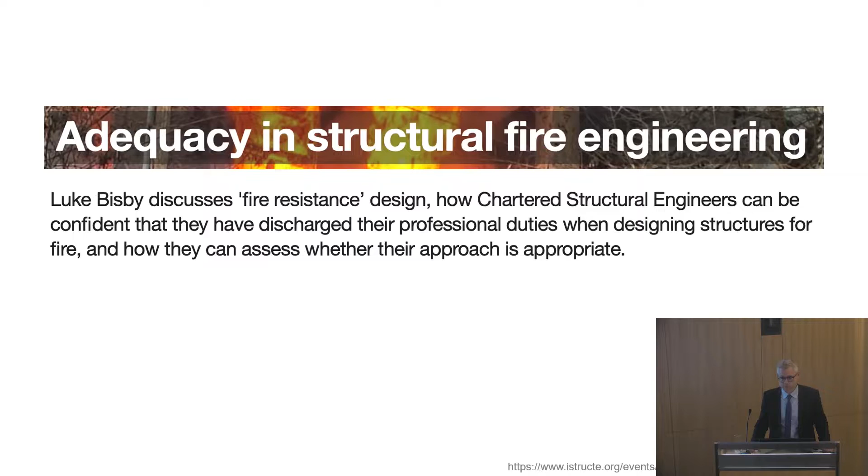I went back and looked at it earlier in the week and thought, is that what I said I would do? Fundamentally, this talk is about trying to answer the question of what is adequate with regards to structural fire engineering. My intent is to be a bit provocative and to open up some discussions that I think are very important for the structural engineering profession to have, particularly now in the United Kingdom.

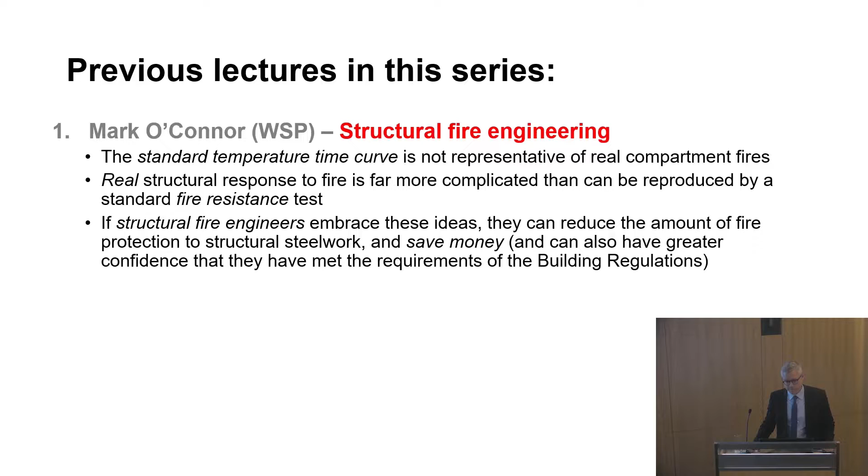There have been two previous lectures in this series specifically focused on structural fire engineering. The first was by Mark O'Connor, whose title was Structural Fire Engineering. To paraphrase the key messages from Mark's talk, apologies if I get this wrong, in his opinion the standard temperature time curve is not representative of real compartment fires. Real structural response to fire is far more complicated than can be reproduced by a standard fire resistance test. I'm going to come back to these ideas as I go through. He said if structural fire engineers embrace these ideas, they can reduce the amount of fire protection to structural steelwork and save money, but also give us greater confidence that we've met the requirements of the building regulations. Of course, I agree with all of those statements.

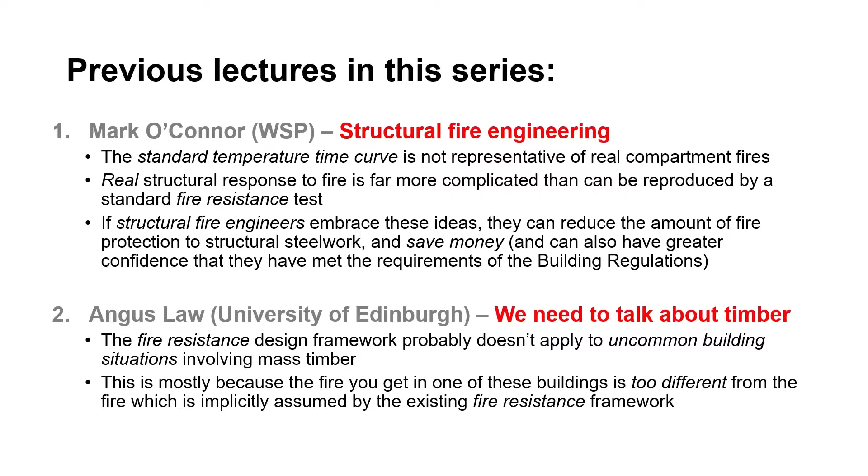Angus Law, my colleague at the University of Edinburgh, titled his talk We Need to Talk About Timber. Paraphrasing Angus, the fire resistance design framework probably doesn't apply to uncommon building situations involving mass timber. This is mostly because the fire you get in one of these buildings is too different from the fire implicitly assumed by the existing fire resistance framework. So there is an assumed and implicit fire that we use to design as structural designers. I put these up because I'm going to come back to all of these ideas as I go through.

Now, I'm going to say some things in this talk that are challenging to this institution and to its members. I'm going to ask chartered structural engineers to reflect on their ethical and legal obligations. I'm doing this because I, too, am a chartered structural engineer, because I wear an iron ring on the pinky finger of my working hand, and some of you will know what that means, and because of my own very challenging professional context during the past 2.5 years.

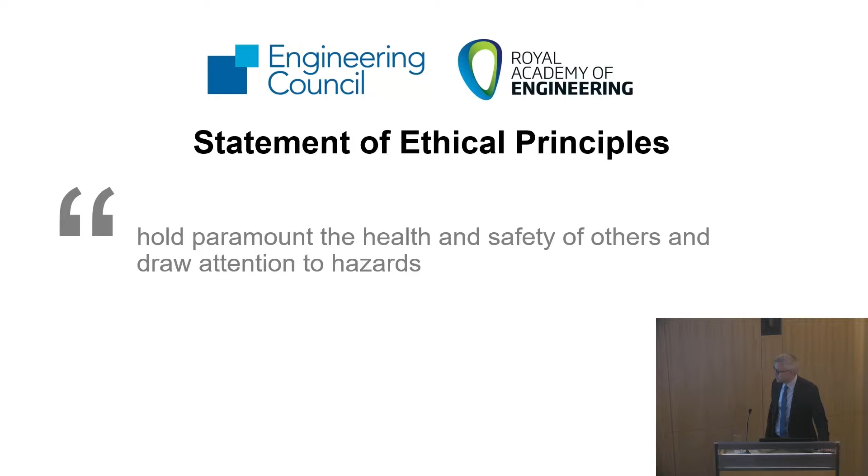As a chartered structural engineer, I am bound by the IStructE Code of Professional Conduct. It says that I should subscribe to the Statement of Ethical Principles of the Engineering Profession, issued by the Engineering Council and the Royal Academy of Engineering. Although one wonders if the word must should be there rather than should, with respect to the context. Nonetheless, the Statement of Ethical Principles requires me as a chartered structural engineer to hold paramount the health and safety of others and to draw attention to hazards. That's what I'm trying to do this evening, and to identify, evaluate, quantify, mitigate, and manage risks, and not knowingly mislead or allow others to be misled. So I'm going to try to lead you away from being misled, if that makes any sense.

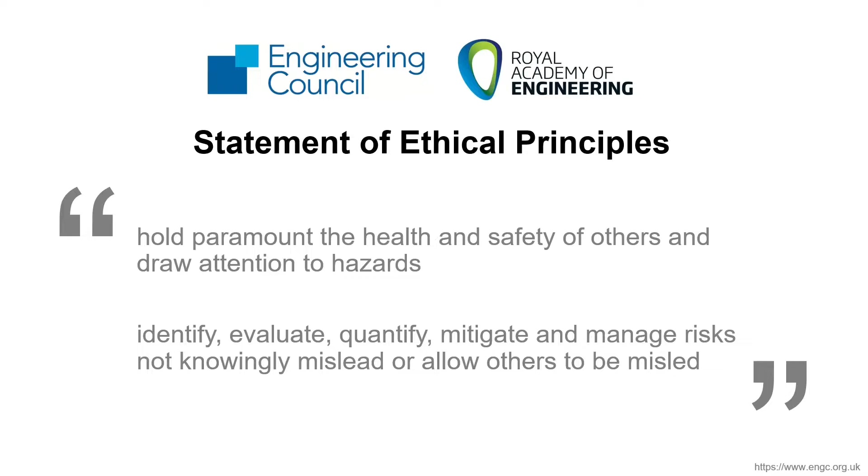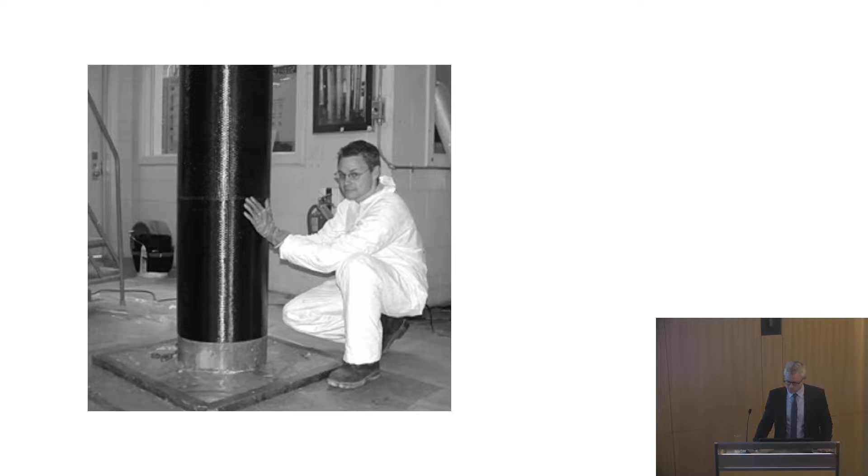My PhD was looking at the fire resistance of reinforced concrete columns that had been strengthened by confining them with carbon fiber reinforced polymers.

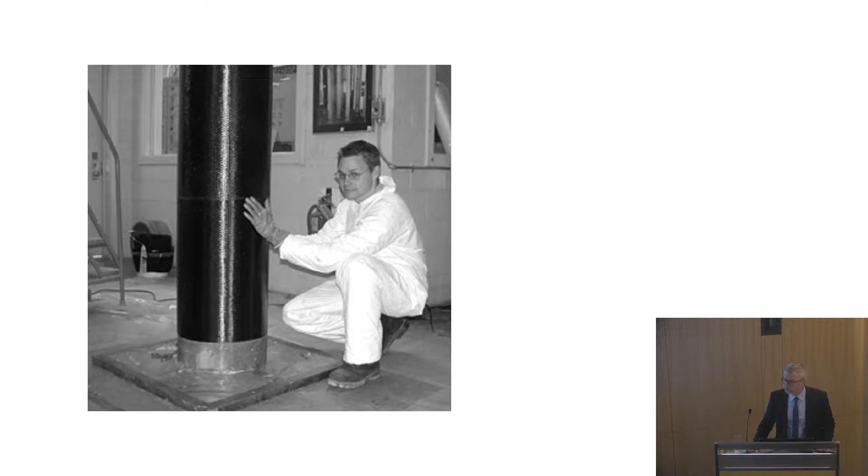So there I am. I've built a reinforced concrete column, and I'm wrapping it in carbon fiber. This carbon fiber is bonded with an epoxy, so it burns rather enthusiastically, it has to be said. I was charged with working with an industrial partner to better understand the fire resistance of these types of structural elements so that they could actually be implemented in buildings.

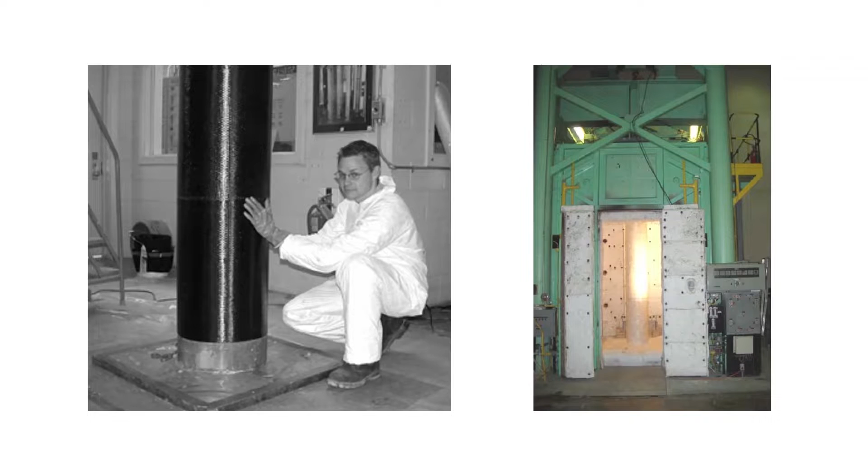So we built some columns, wrapped them in carbon fiber, applied some insulation, and stuck them inside a fire testing furnace at the National Research Council of Canada in Ottawa. We subjected them to a vertical load that we decided was approximately the load the column might be subjected to in a strengthened situation in service in a building.

We closed those doors on the front, and we subjected that column to the standard fire, a standard temperature time curve, using a bunch of very high-powered propane burners.

We didn't know what the inadvertent eccentricity at the top of the column was. We didn't know what the fixity of the column was at the top or at the bottom. We couldn't measure its lateral deformation during the fire. We just put some load on it and heated it until it broke, and we called that the fire resistance.

We did all that because our industry sponsor for the project was focused on one thing and one thing only. He wanted to get a fire resistance rating.

And yet the fire resistance justification we came up with didn't need to be supported by full-scale fire resistance tests. It didn't need to be supported by the detailed finite difference heat transfer models I developed as part of my PhD, or the detailed fiber section structural response models I also developed.

All that was needed was a little bit of fundamental understanding, a little bit of understanding of what fire resistance is, and a little bit of engineering judgment.

But nonetheless, our industry partner got his 3-hour fire resistance rating, he got his certificate, and he went off into the world and made shed loads of money, I can tell you. And of course, I got my PhD, because here I am.

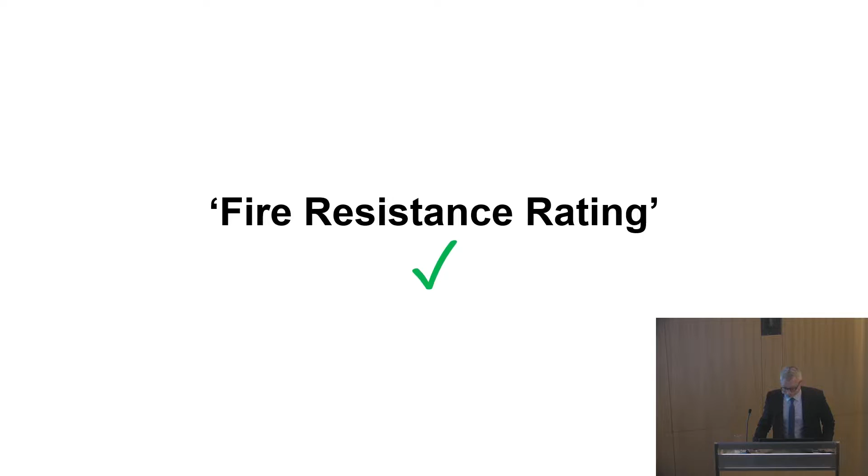But I knew that I hadn't earned it. And so I started my atonement, the making of amends for the sins of my PhD.

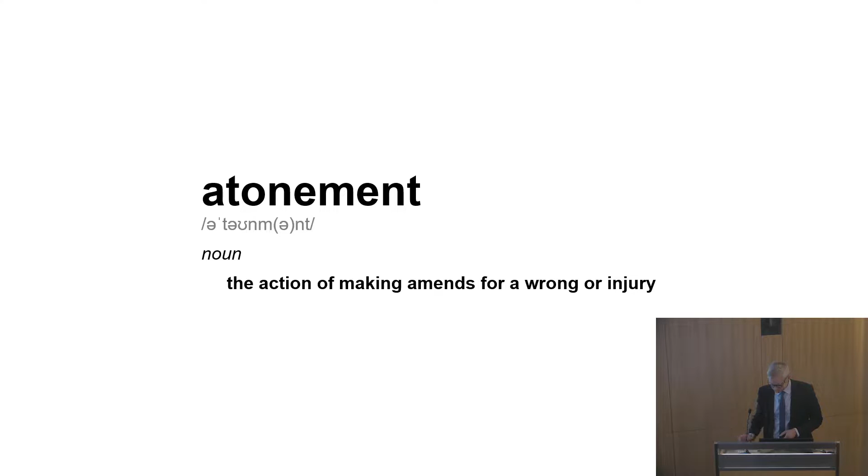I was inspired in my atonement by the post-Cardington performance-based structural fire engineering design movement that was happening here in the UK at the time. See Mark O'Connor's prior talk if you want to learn more about Cardington and what came out of it, and what then happened in the industry as a consequence.

I moved to the University of Edinburgh to become an evangelist structural fire engineer. I started spreading the gospel of performance-based structural fire engineering design.

This gospel was very well summarized by Mark O'Connor in the talk he gave previously. And here I'm quoting directly from his conclusions without his permission, so apologies to Mark. He said performance-based structural design for fire can lead to more economical design compared to simple approaches, so we can save money.

It's suitable for more innovative and more complex buildings. I agree. It provides a better understanding of the actual structural behavior of the building during a possible fire. Again, I agree. And it can identify more critical parts of the structure for fire.

For more than a decade, I've been repeating these very same messages over and over and over. And I did and I do believe all of this.

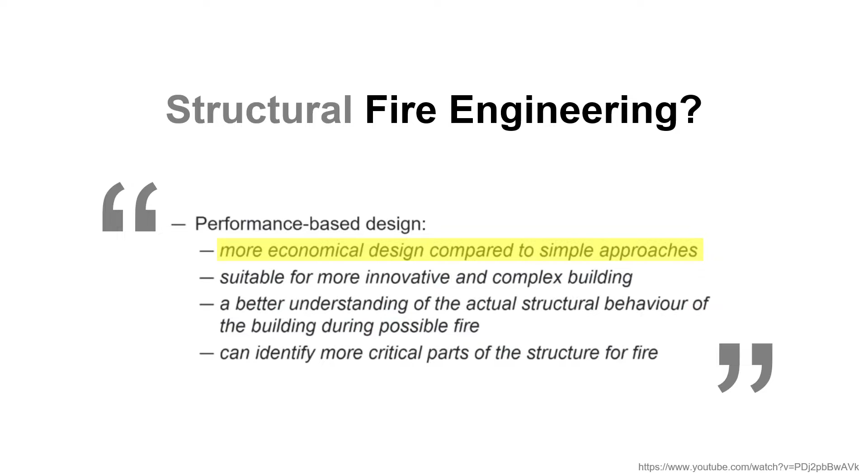But in most cases, what I've found in talking to people is that the real justification for doing this work seems to be the financial savings, the financial savings that developers could reap as a consequence. And I started to wonder, surely, if we're genuinely trying to fulfill the requirements of the building regulations, shouldn't we be doing all of these other things anyway?

And so then I started to feel delinquent. Was I, in fact, failing in my duties as a chartered structural engineer?

And then one morning in the summer of 2017, I woke up very early in a hotel room in Sweden with my phone buzzing and beeping, and the world had changed forever.

And I started to think much more deeply about our responsibilities as chartered structural engineers. And in particular, I started to think about this most important word, adequacy. What is adequate?

Now, the first place most of us would normally look for guidance on this issue is in the building regulations. So I'm quoting from the building regulations, England and Wales. What do they say about the structural engineer's responsibilities with regards to fire safety? Well, in Part B, and here I'm cutting and pasting bits of the building regulations with apologies, under Part B, amongst other things, it says, with respect to internal fire spread, structure, the building shall be designed and constructed so that in the event of a fire, its stability will be maintained for a reasonable period.

Stability. What do we mean? What does it mean for something to be stable? Or perhaps more importantly, what does it mean for something to be unstable? How unstable? How much of the structure? Where? When? For how long?

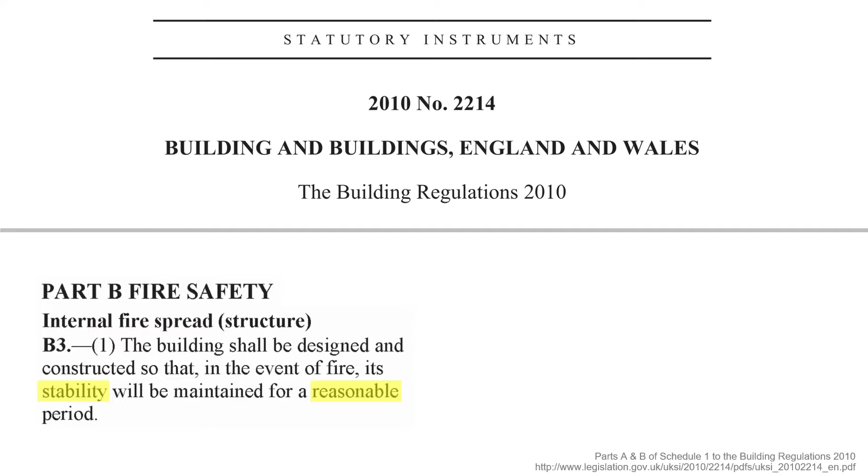So Part B says these things, and I'm going to talk in a minute about how we actually deliver on that requirement in the building regulations by using the approved documents. But we also need to look at Part A. Part A, structure. If you're a chartered structural engineer, this is the part you should be looking at most closely, I would imagine. And under A3, under disproportionate collapse, it says the building shall be constructed so that in the event of an accident, the building will not suffer collapse to an extent disproportionate to the cause.

The use of the word accident is important. I've looked through all of the relevant guidance, both the UK guidance and the European guidance, and fire is absolutely caught under the term accident. So that includes fire.

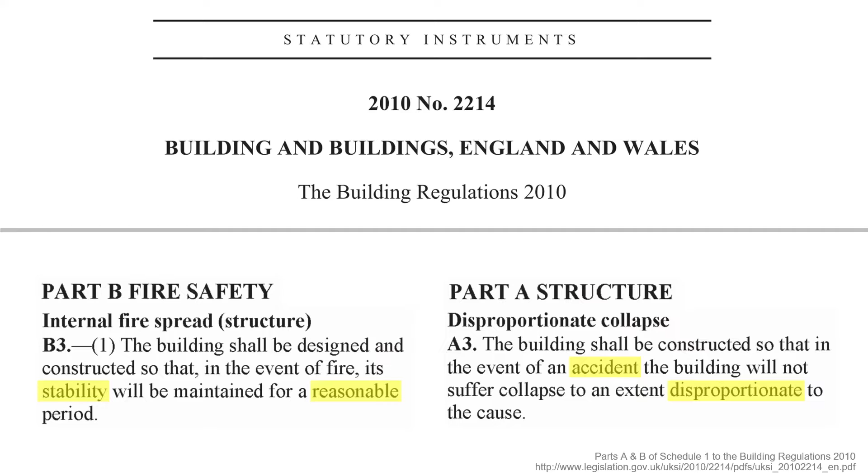The building will not suffer collapse to an extent disproportionate to the cause. How much collapse is disproportionate to a fire occurring in the building? Again, engineering judgment is required in order to assess how much collapse is disproportionate to the cause of a fire in a building.

So let's look a bit more deeply at this. Most of us in England would then go to the approved documents for guidance on how to meet the requirements of the building regulations. In terms of fire, we would end up in approved document B, as I've already mentioned. This is bits cut and paste from the latest version of approved document B. We'd find ourselves in section 7, load-bearing elements of structures, and we'd look and we'd find a section entitled Fire Resistance Standard.

Fire resistance is a very important pair of words for us. And what it says is that the elements of structural frames, beams, columns, load-bearing walls, internal and external, should have, as a minimum, the fire resistance given in Appendix B, Table B3.

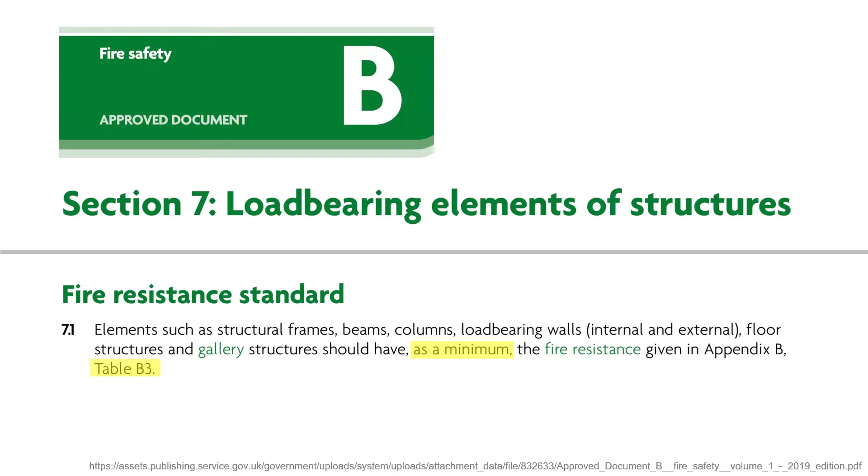So what does Table B3 tell us? Well, Table B3 actually points us almost immediately to Table B4 in the latest version of ADB. And this is the minimum periods of fire resistance. So what is this fire resistance, and what would it be for a building?

So let's just hold up one potential building. Let's say I have a residential building. Let's say this building is a block of flats. Let's say this building is more than 30 meters tall or 15 stories. The reason I've chosen that should become obvious in a second. It's not a particularly uncommon building, though. A 15-story resi building in London is not that uncommon.

If it's that tall, I must have sprinklers. So my building is sprinklered because I'm not allowed not to have sprinklers if it's a new build. And my fire resistance requirement would be 120 minutes. What does that mean, 120 minutes of fire resistance?

I don't think that most structural engineers actually know. And I can say that because I was educated as a structural engineer at one of the best engineering schools in Canada, and I didn't know. I didn't know when I started my PhD. I'm not sure I knew when I finished my PhD.

I'll come back to that in a minute.

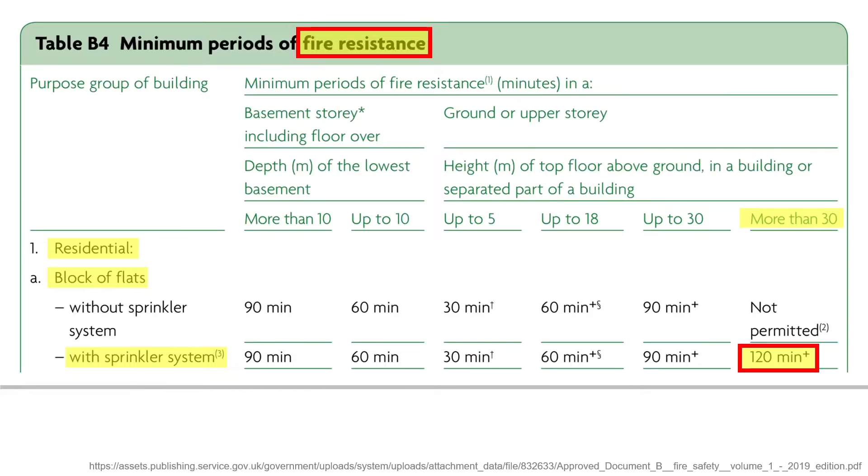What does Approved Document A tell us about these accidents we have to consider? If we look in there, we'll end up in Section 5, reducing the sensitivity of the building to disproportionate collapse in the event of an accident. Accidents include fires, definitely, there's no debate about that. What Approved Document A does, in the context of disproportionate collapse, is talk about consequence classes of buildings.

It has consequence classes 1, 2A, 2B, and 3. For consequence class 3, it says a systematic risk assessment of the building should be undertaken, taking into account all the normal hazards that may reasonably be foreseen, together with any abnormal hazards. That's pretty clear about what we need to do.

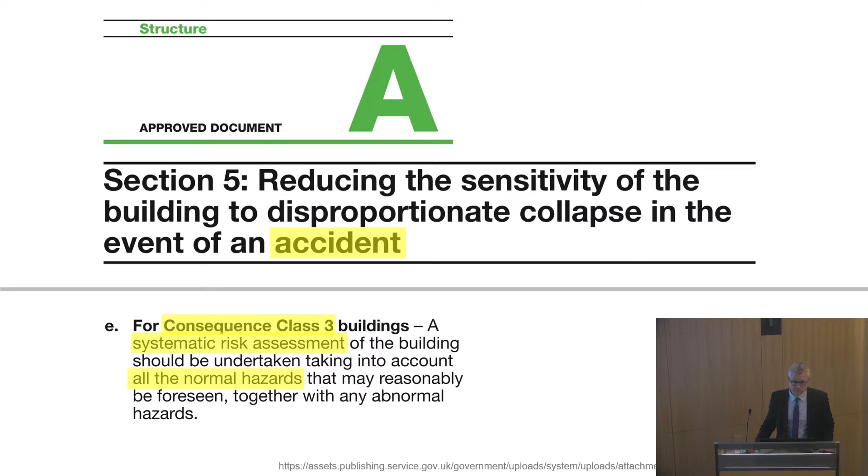So what is a consequence class 3 building? And what would constitute a systematic risk assessment? And what hazards are we worried about? Let's think about fire. So if you want to know what the consequence classes are, you end up looking at Table 11.

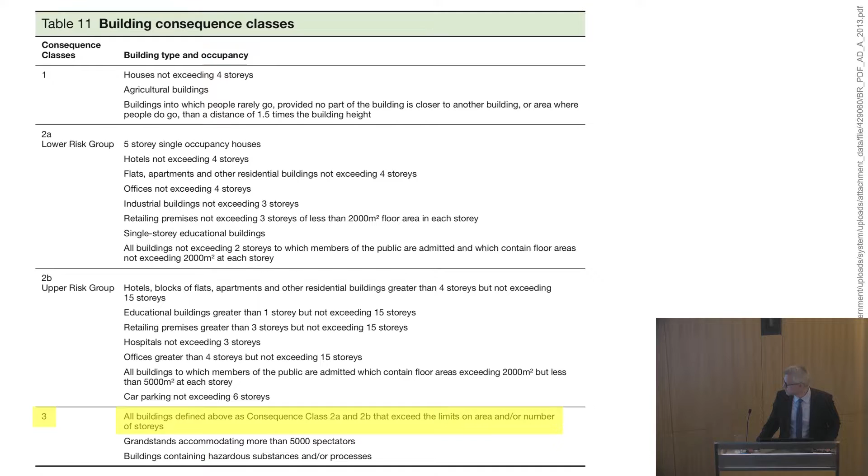I recognize that many of you are unlikely to be able to see this, so I'll read it. Consequence class 3 buildings are down here at the bottom of the table. It says, just as an example, all buildings defined above as consequence class 2A and 2B that exceed the limits on area or number of stories. So I go up and look at 2B, and let's look at the first line of that.

Hotels, blocks of flats, which is the building I looked at in Approved Document B, Table B4, and other residential buildings greater than 4 stories but not exceeding 15 stories, or more than 30 meters actually, but 15 stories. Also included there: educational buildings greater than 1 story but not exceeding 15 stories, retail premises, offices greater than 4 stories but not exceeding 15 stories.

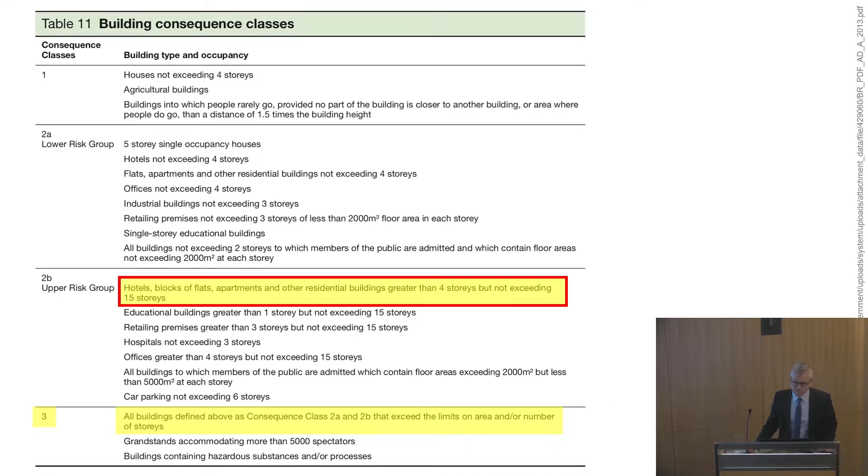So any building that's more than 15 stories, you are required to do this systematic risk assessment of the building, taking into account the hazards that may reasonably be foreseen. And there it is for us again. I'm going to come back to both of these points in a minute in terms of how a fire engineer and a structural engineer might approach these two requirements in the building regulations.

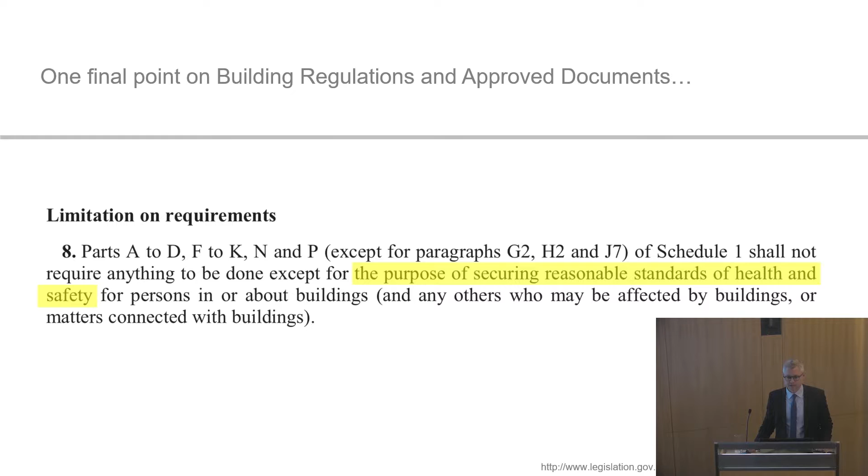Just as a final point, it's worth always pointing out, I think, when we talk about the building regulations with respect to fire safety - and I think it's worth structural engineers and fire engineers pointing out to their clients, and perhaps more importantly to their clients' insurers - that the purpose of the building regulations is to secure reasonable standards of health and safety. It's not to protect the property, the business, or the assets - it's to protect health and safety of persons. So if you want more than that, that's a conversation everybody should be having. I'm not sure many people in the industry have really recognized that in a fundamental way, and I think it's worth saying as often as possible.

So what is fire resistance? Fire resistance came up a lot there. What is fire resistance and where did it come from? This is something I think all structural engineers should know, so I'm going to labor the point, I'm afraid. If you already know where fire resistance comes from, the history of it and the intent of it, then I'm sorry - this will be quite boring for you. I think it's super interesting, personally.

So then the natural question is, how would I assess R, E, and I for a structure? If I go back and look at my Table B4, the fundamental question is, what does this 120 minutes actually mean? Where did it come from? Who decided? When? And using what knowledge? These are the questions we need to ask.

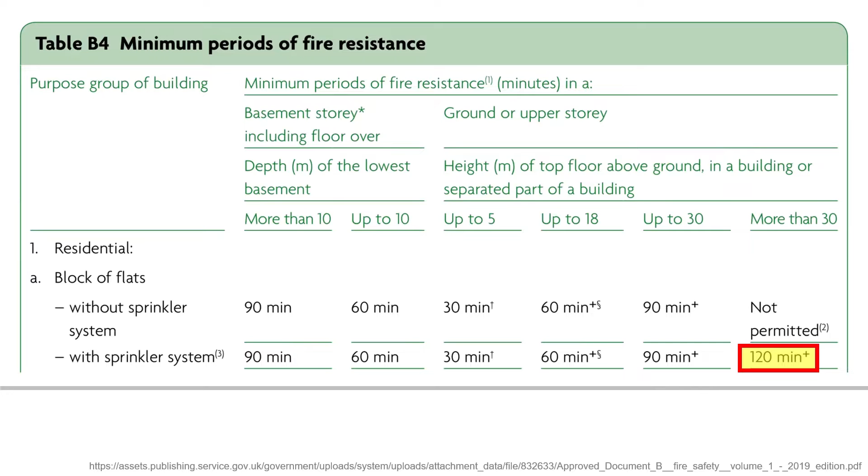So what's the fire I need to provide resistance against? Given that all fires are different, as we know.

These are some of the earliest available photos of what we might call modern, in quotes, fire resistance tests on structural elements. These were done by Edwin Sachs here in London, just up the road actually, in Regent's Park, in 1902, 1903. These consisted of brick huts - you can see on the left there, that little sign in the top left corner says hut number 1, the other one is hut number 2, with fuel supply provided, and again you can see the fuel supply in the image there.

In this case, structural elements were placed on top of the huts and were loaded, as you can see there, with a pile of what looked like bricks. And the elements were heated until they failed.

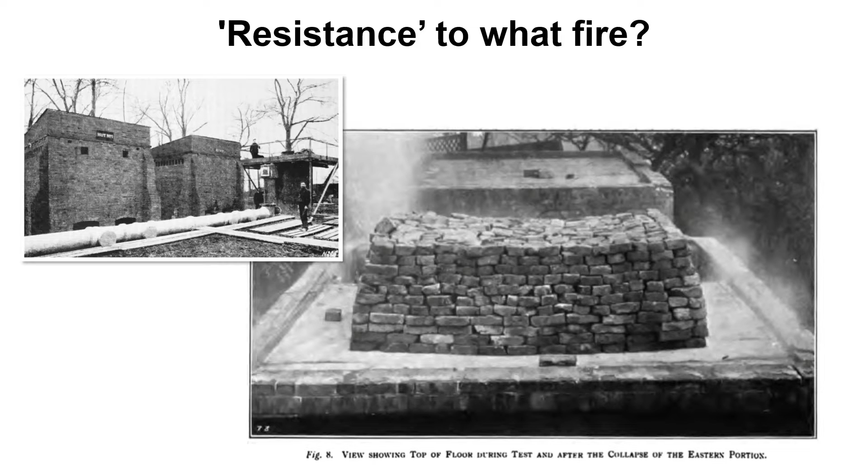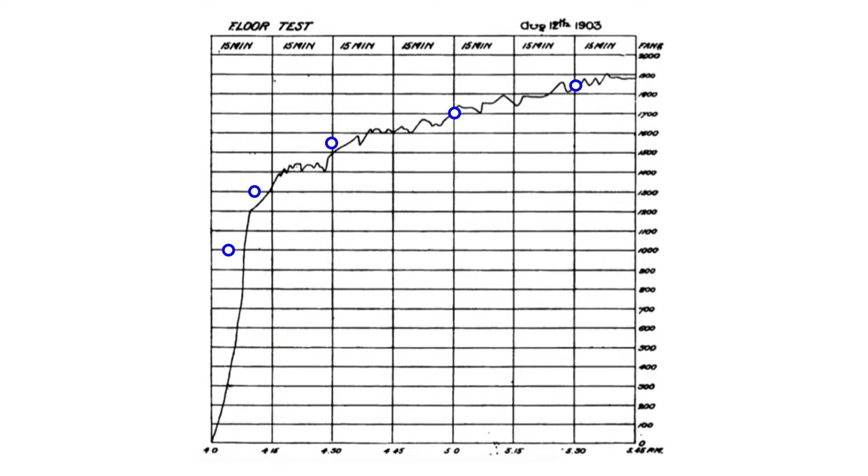More than a decade later, this is just one test, international meetings were held to try to decide with British and American colleagues what the standard fire, or what a standard fire, should be. And by committee, these points were chosen. I think we can guess how they chose those points, although I've not seen a written record of how those points were chosen. That led to this curve being defined by committee.

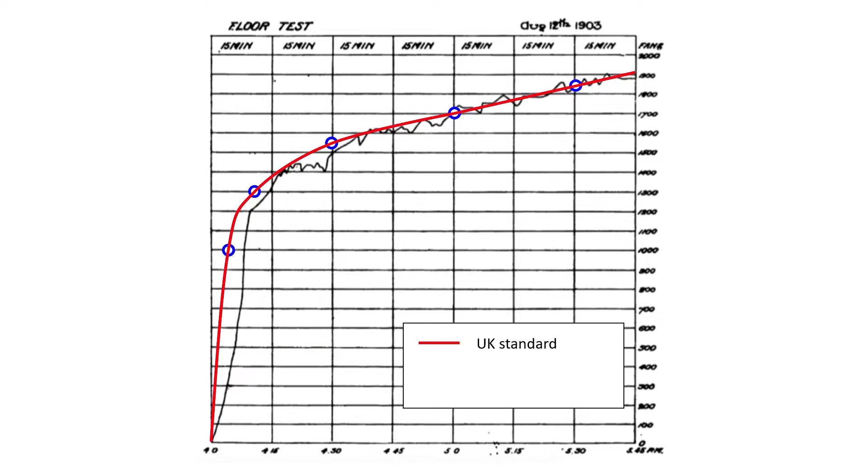And that eventually became the UK standard. It also became the US standard. Eventually it also became the ISO standard. And it's still the standard that we use today.

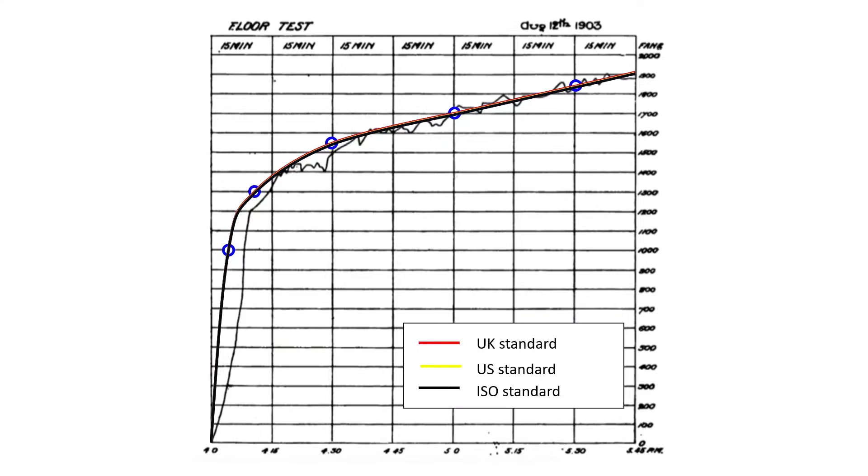At the time, Ira Woolson, the American chap who was leading this effort, made this incredibly prescient statement. He said, 'We want to get it as nearly right as possible before it is finally adopted, because after it is adopted by these various organizations, it will be pretty hard to change.' Also demonstrating that he was a true master in the art of understatement.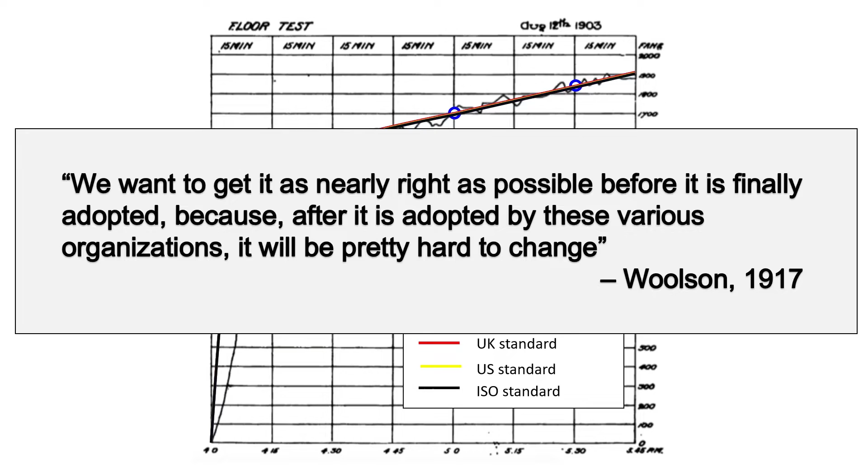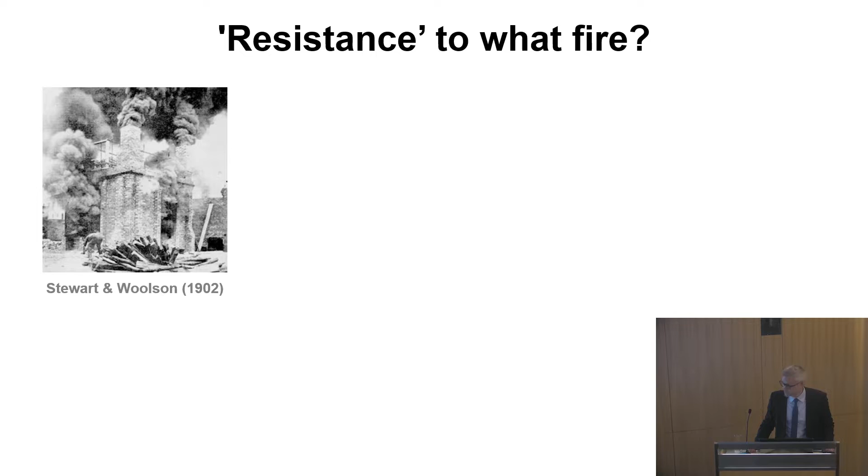So where does fire resistance come from, and what fire am I providing resistance against? It was ad hoc tests that looked something like this. This is one of Woolson's tests in the US from the same era. That led to a standard fire resistance time temperature curve that looked not something like, exactly like this. I don't know if you noticed in the previous plot, but it ended at 1 hour and 45 minutes. So it appears what they did is just straight-lined it from that point.

And that remains almost exactly what we use today. So if I was running a fire resistance test today, I'd be using a very fancy version of the brick-lined box on the left. And there's some really important things to understand about this. Really important things to understand.

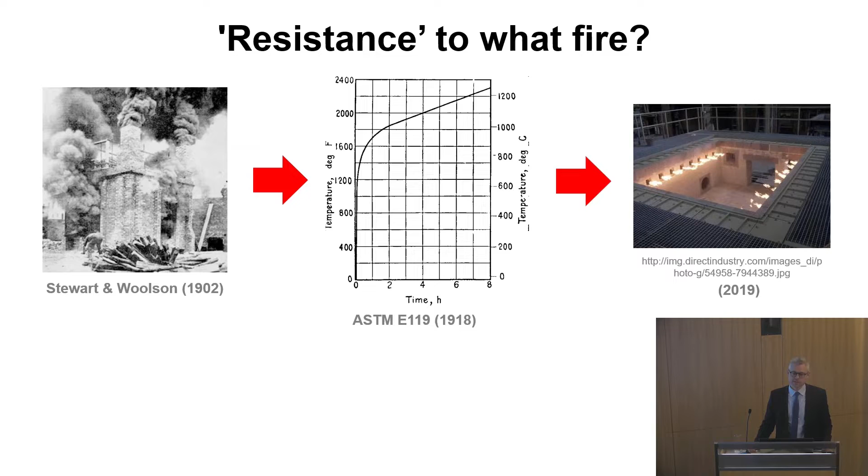Standard fire resistance tests, standard fire tests were originally conceived as comparative tests of alleged fireproof building systems. These tests were being used to compare systems, not to rate systems. The standard fire curve came into existence in a world where fire resistance ratings did not yet exist. The standard fire is not a realistic representation of a building fire in a number of respects. It was set out by committee, as I've mentioned, before anyone had actually bothered to measure the temperatures in a real building fire. They hadn't yet done the research. And it was originally suggested without the intent to assign any fire resistance ratings, as I've mentioned.

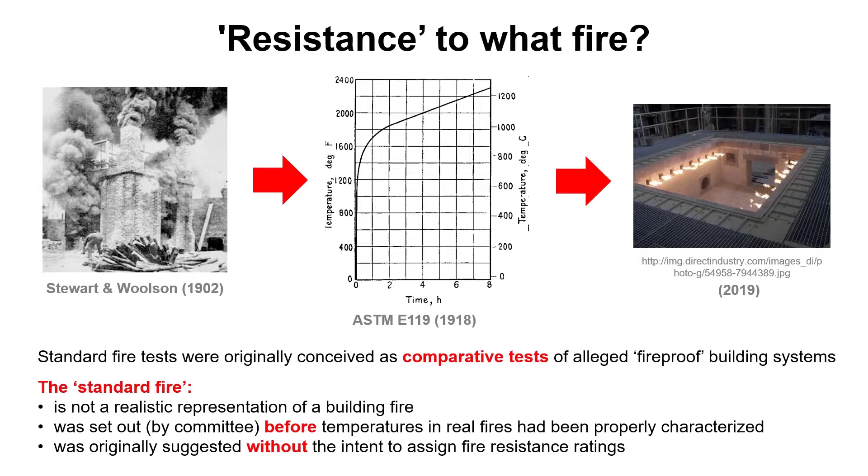But this standard fire bears little resemblance to the fire that I'm going to get in my actual building. So how can I relate the one to the other, the standard fire to the actual fire?

Well, in the 1920s, a chap called Simon Ingberg started doing tests of fires in actual compartments with actual fuel and measuring the response. This is a schematic, cartoonish diagram to show the kinds of response that he was observing. He noticed that fires grow and burn and then run out of fuel and cool. And he wanted to relate this fire, the actual fire, to the standard fire, because the standard fire had been set in stone 5 to 10 years earlier.

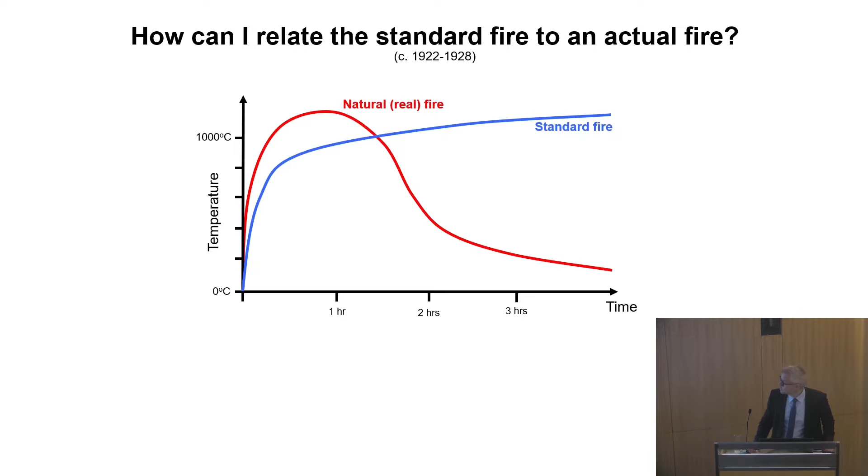So what did he do? He said, okay, well, if I have a standard fire and I have a natural fire, what area above a threshold temperature under the natural fire would be captured by the same duration of heating under the standard fire? So he said, if these two areas are equal, that is an equivalent fire. And that is why fire resistance has units of time.

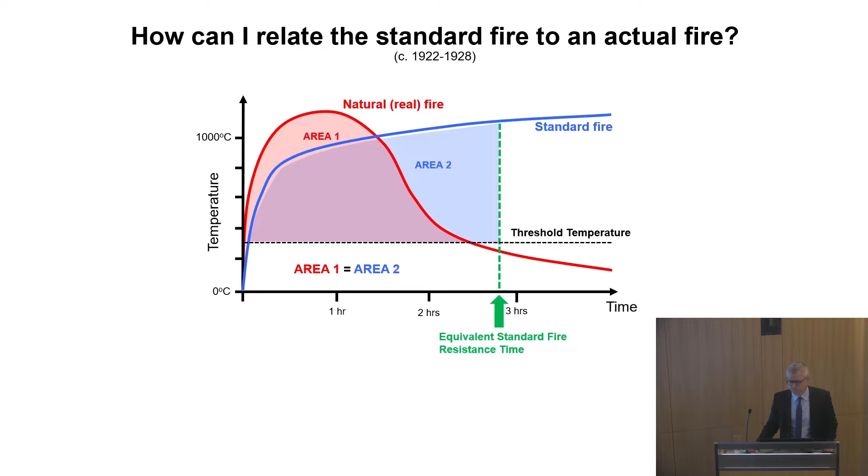So Simon Ingberg postulated that the full history, i.e. until burnout of the fuel, until we've run out of fuel and the fire has gone away without any intervention, of a compartment fire can be related to the duration of the standard fire that gives the same area under the curve, and he called this fire severity. It should actually have units of Kelvin time rather than time, if you want to be specific about what it is.

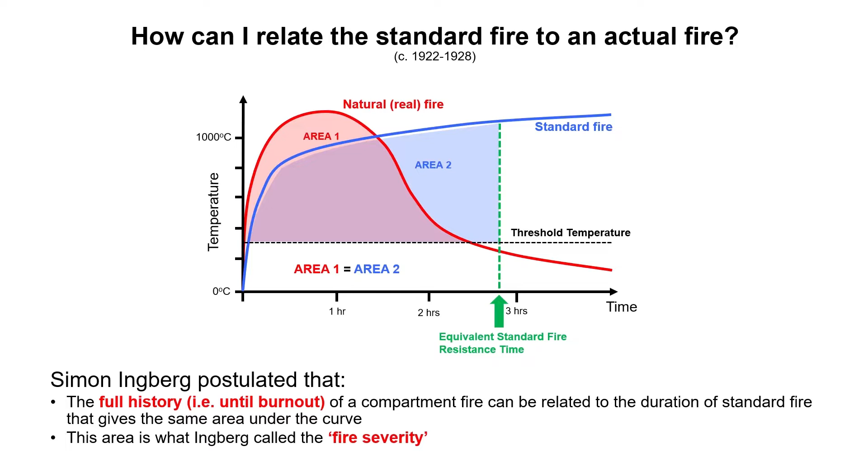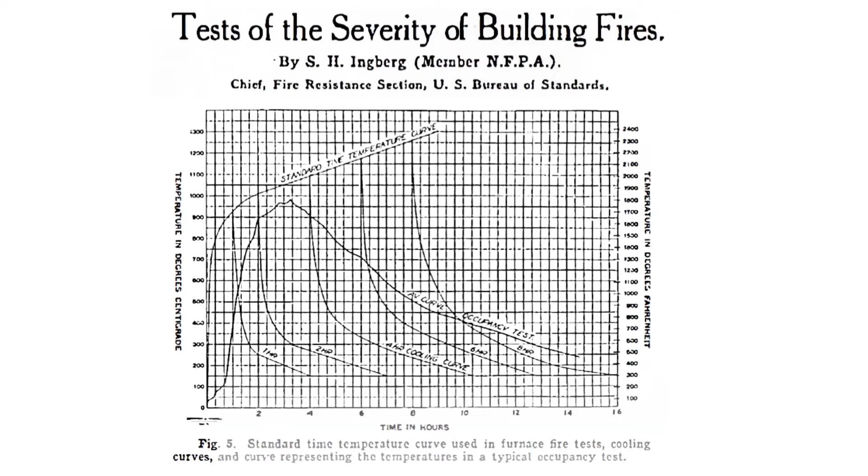Just to prove that I'm not making this all up with my cartoon, here's some of Ingberg's original data. You can see the standard fire curve sort of slightly there, and you can see a number of cooling curves. He didn't actually take a straight line, it's slightly more complicated, but that is essentially what he did. And you can see an actual fire curve there.

So I've agreed our standard fire. We've made that, and we've agreed the method to relate our standard fire to a real fire. But we've not yet figured out for a given building how much fire resistance we need. Do I need 30 minutes or 60 minutes or 90 minutes or 120 minutes? How much fire resistance do I need?

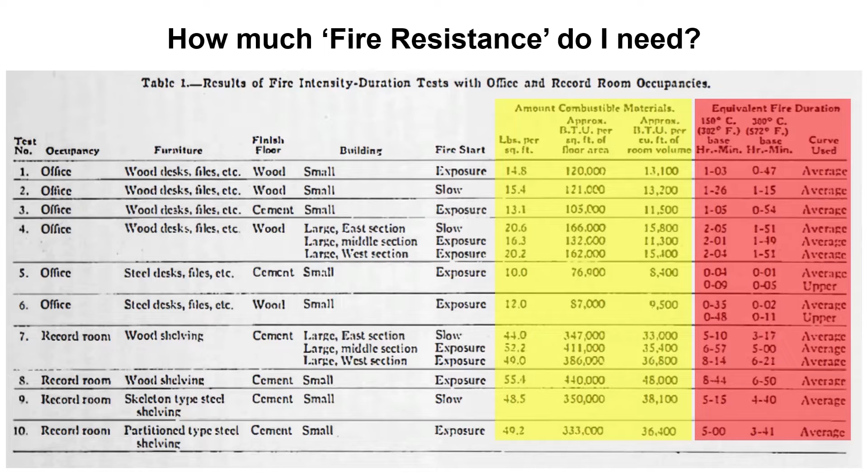And based on all that work, Ingberg then proposed a scheme by which the fire resistance requirement for a building would be based on the amount of fuel that was in it. So if you have a room with 10 pounds per square foot in it, you need an hour of fire resistance. If you had 60, you need 7 hours and 30 minutes.

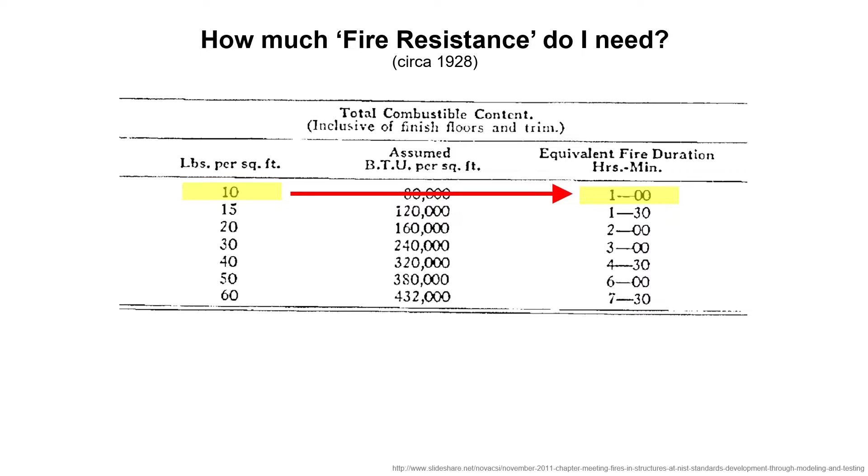So Ingberg, incorrectly, it has to be said, said that fire severity depends only on fuel load. Fire resistance requirements for different occupancies are explicitly linked to fuel loads, which are explicitly linked to burnout fires. And of course, Ingberg was wrong. We know much more about fire dynamics and fire science now. We know that this isn't true. We know that ventilation is important, that thermal boundary conditions are important, and that various cross breezes and other things are important.

But what's important to take away from that is that fire resistance originally implied burnout without intervention. It implied that the fuel burns and goes away. It didn't imply that a fire resistance of 120 minutes means that if the building falls down at 121 minutes, we have done our job.

And if you want evidence of this, I cannot recommend highly enough reading PWBS, which stands for the Post-War Building Studies. I would recommend anyone in the room with any interest, get yourself a copy of the Post-War Building Studies and read them. It's all laid out, plain as day, in the 1940s.

Oh, and just as one final point here, Angus Law, in the previous talk in this series, pointed out that fire resistance shouldn't apply to CLT buildings with significant amounts of exposed timber surfaces, because those exposed timber surfaces will contribute to the fire dynamics in the compartment and extend the duration of burning.

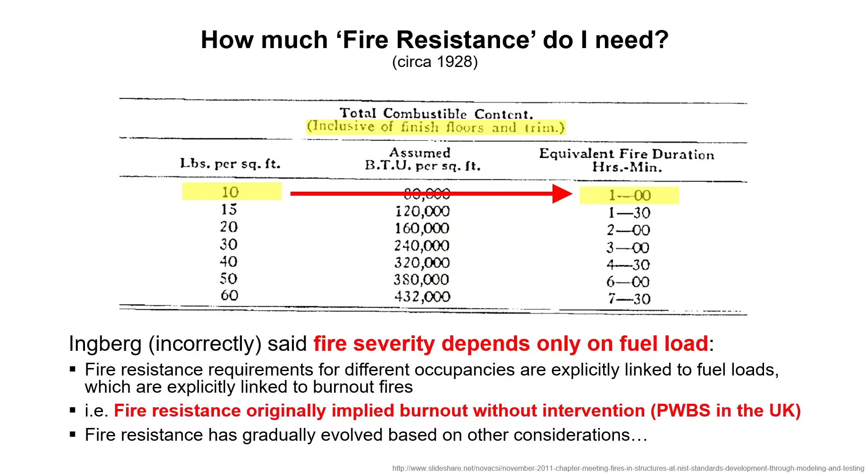Ingberg recognized this in the 1920s. You can see in the highlighted bit: total combustible content inclusive of finished floors and trim. So if Ingberg had exposed CLT, he would have included it in the fuel load at the very least.

And that's where fire resistance comes from. And it's also why it has units of time. But of course, this isn't real time. This is equivalent time. It has no specific relationship to real time. And I think that's actually a very serious problem in the discourse around these issues.

And so anytime I'm asked to speak about this, I point out that we should actually change the way we're talking about it. I think we should say fire resistance points, and I think this would actually go a long way to stopping the inertia of this flawed concept. If we simply stop using minutes or hours and we start saying points, it's a 30-point column, it's a 60-point door. That removes this false reliance on the idea of time.

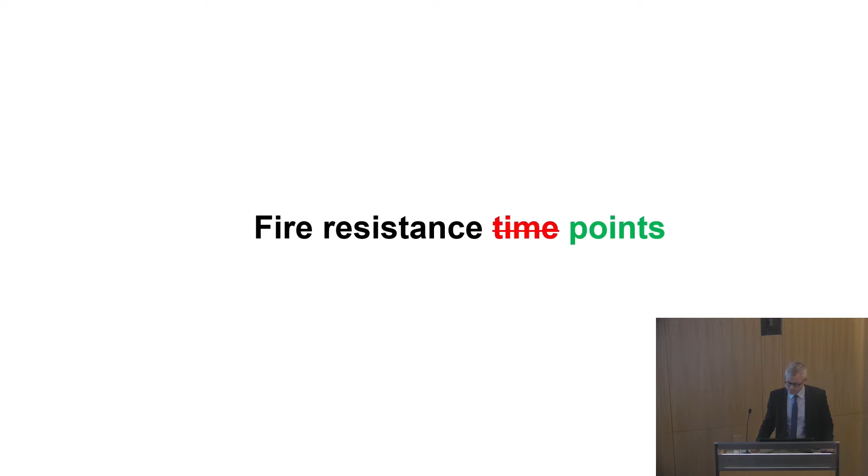But enough about the fire. This is the IStructE, of course, and I'm meant to be talking about structures, so sorry about that.

Most people who've looked seriously at the standard fire resistance tests in terms of the structural mechanics aspects - forget the heating curve, let's talk about the structural mechanics of a fire resistance test - most people who've looked at it for more than half a century have reached approximately the same conclusion: fire resistance tests fail to capture or predict real structural response to fire.

On the left, I have a burning building. That's, I think, a 47-story steel-framed office building in New York City that was subjected to an office contents fire and collapsed entirely. That building is made up of a very complicated three-dimensional system of beams, columns, and slabs, composite, various interesting types of connections, all sorts of interesting geometries and interactions in that building when it's being heated.

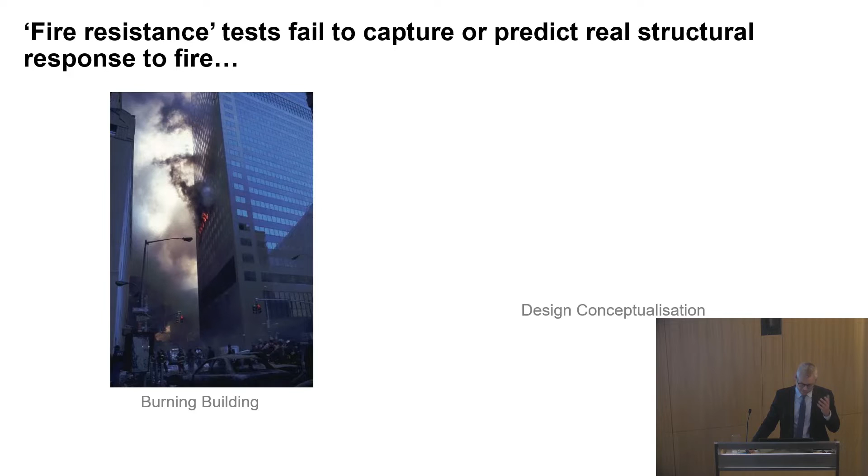The way that building would be conceptualized via fire resistance testing, which is how we achieve or understand fire resistance, would be that we build a box. We put some propane burners in the walls of that box. We put our structural element, whether it's a beam or a slab, and isolate it on top of that box. We put some load on it that represents the in-service loading we'd expect at the time of a fire. And we turn on our propane so that it follows the fire resistance curve I showed you previously, which represents the committee decision from the early 1900s, as I've already said.

And we would then wait. We would wait for that structural element to collapse and fall into the furnace, or, if this was a slab or a wall, or a door for that matter, we would wait for either hot gases to pass through that structural element, or we would wait for the temperature on the unexposed surface of that element to exceed some upper temperature limit - which, as far as I can tell, represents the auto-ignition temperature of industrial cotton waste continuously in contact with the outer surface.

So again, it's worth asking ourselves: does this sound like part of a systematic risk assessment that is demanded in Approved Document A? And indeed, does use of the standard fire sound like part of a systematic risk assessment that is demanded of structural engineers in Approved Document A?

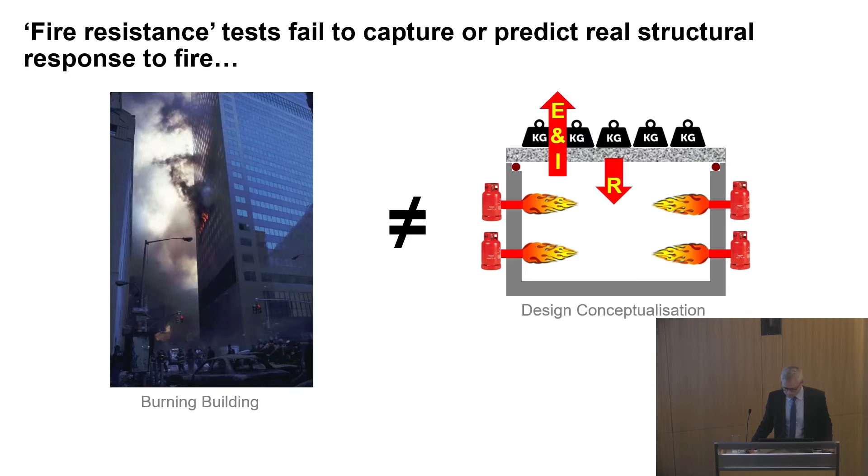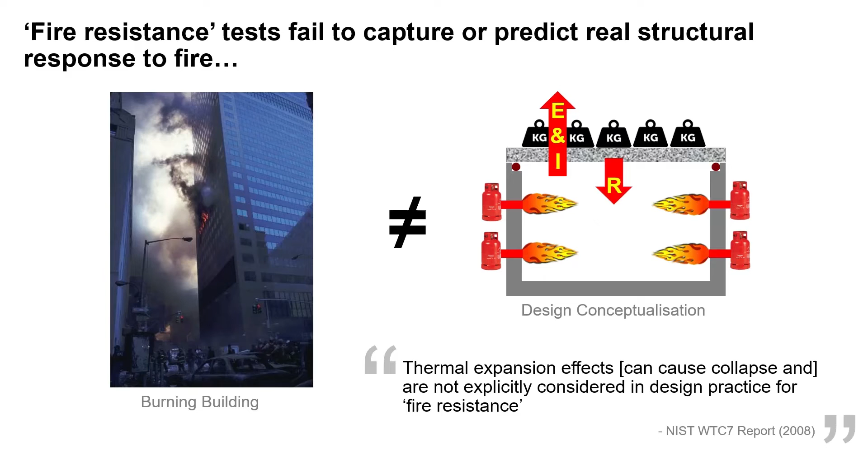Well, NIST, the National Institute of Standards and Technology in the US, after spending 7 years investigating the collapses of the World Trade Center towers 1, 2, and 7 - which is the building on the left in my picture here - they said no, it doesn't. Thermal expansion effects can cause collapse and are not explicitly considered in design practice for fire resistance. And they were pretty categorical about that, and they issued a number of recommendations on that basis.

A little bit closer to home, and by home I mean Canada, Harmathy and Lie, two seminal figures in the fire research community in the 1970s in Canada, said this about fire resistance and fire resistance testing: in a strict sense, the standard fire resistance is not a measure of the actual performance of an element in a fire and is not even a perfect measure for comparison. The fire load concept must be abandoned, and we have to come up with a truer representation of the conditions that will probably be met. This is 4 years before I was born.

Here in the UK, in 1981, Margaret Law, who's probably the seminal figure in UK fire safety engineering, said the standard temperature time curve is not representative of fire in a real building. Indeed, she was even more harsh: it is physically unrealistic and contradicts available knowledge. The required duration of fire exposure in the standard test is open to criticism on a number of grounds and should be revisited - it has not yet been seriously revisited. The loading and end conditions in the standard test are not well defined and clearly cannot represent the continuity, restraint, redistribution, and membrane action in real buildings. And Margaret Law wasn't even a structural engineer, and she could recognize this about our structural response modeling in furnace tests.

So at this point, when I give talks like this, someone normally says: but Luke, why aren't buildings falling down in fires then, if this is also wrong or also irrational?

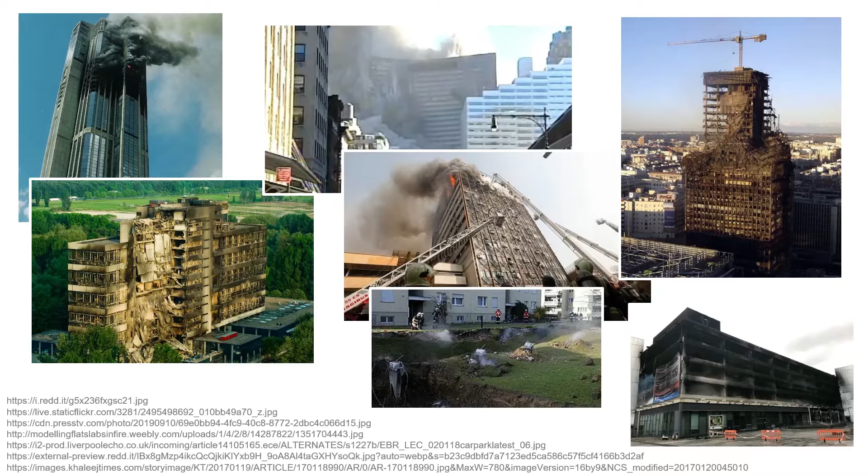Even if we assume that these failures, partway through the fire, can all be discounted for a host of different reasons - the sprinklers weren't working properly, the building was under construction, the firefighters didn't intervene - we still have to ask the question: is that because we've actually undertaken a systematic risk assessment, or simply because we're lucky, or maybe because we're just very, very conservative in the way that we design buildings to resist fire, or maybe both in some combination.

So what would be better? How should we change? How should the structural engineering profession change? What new guidance is required? Well, to be honest, I've looked, and I think it's already there in the codes. It's just really hard to do. And so in most cases, it's not happening.

To give you an example of it being in the codes, in the US since 2010, and actually as a consequence of the 9/11 attacks and the collapses that were observed in 9/11, the load case for extraordinary events, as they call them, which includes fire, has included a new term, AK. This AK term represents the load or load effects resulting from the extraordinary event itself. So in the case of fire, this would require designers to account, for example, for self-stressing due to differential thermal expansion on heating, or lateral push out of columns when a floor plate expands in a building in a fire.

In the UK, if we follow the approved document B route to meet the requirements of B3 that I put up earlier, we would eventually find our way to the Eurocodes, where the combination of actions for accidental design situations, again which includes fire, is given in a horrendously opaque format, it has to be said. So you'll have to take my word for it, unless you know the Eurocodes inside out, that this term here, AD, is essentially the same as the AK term in the ASCE equation that I put up previously.

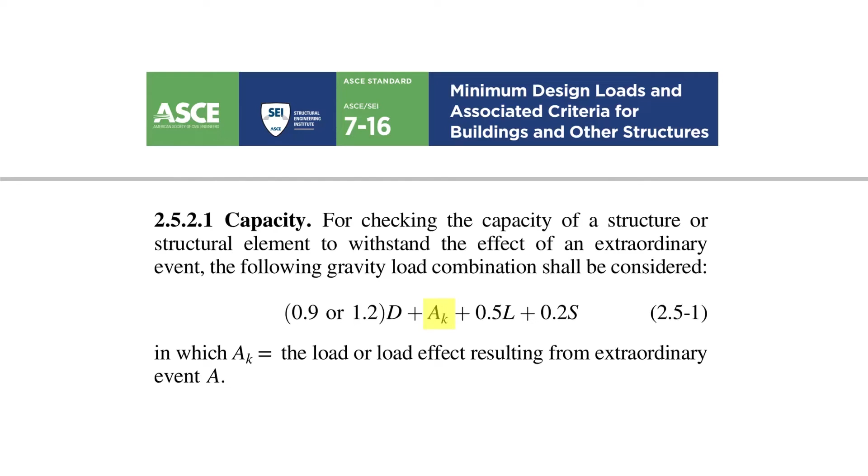Maybe I'll just go back to that ASCE equation here, because structural engineers like this equation because it's pretty obvious: dead load, live load, snow load - they tend to be less than 1 because it's an accidental load case - and my AK term has been added to account for the fire. Eurocode does essentially the same thing.

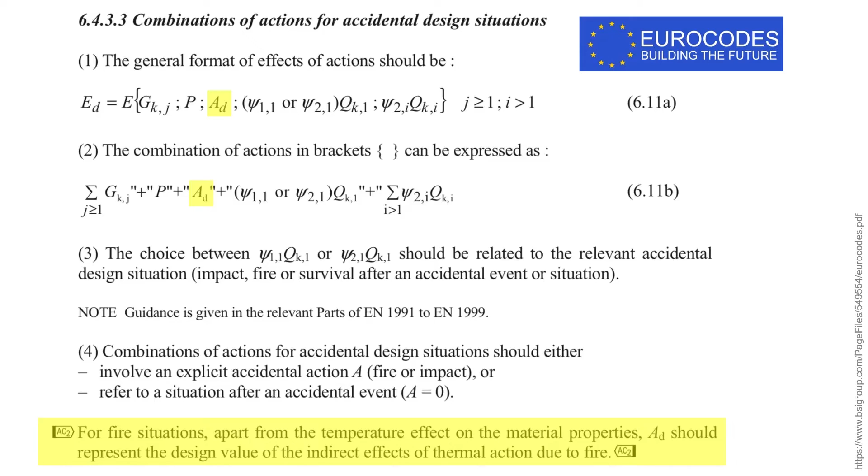It has this term AD, and you can see here that AD represents the design value of the indirect effects of the thermal actions due to fire. So what are these indirect effects, these design actions of the indirect effects, and how would we calculate them? Well, the Eurocode gives us guidance on this in Section 4 of 1991, Part 1, Part 2, I think, where it's talking about the mechanical actions that you should consider for structural analysis. And it says, for assessment of the indirect actions, the following should be considered.

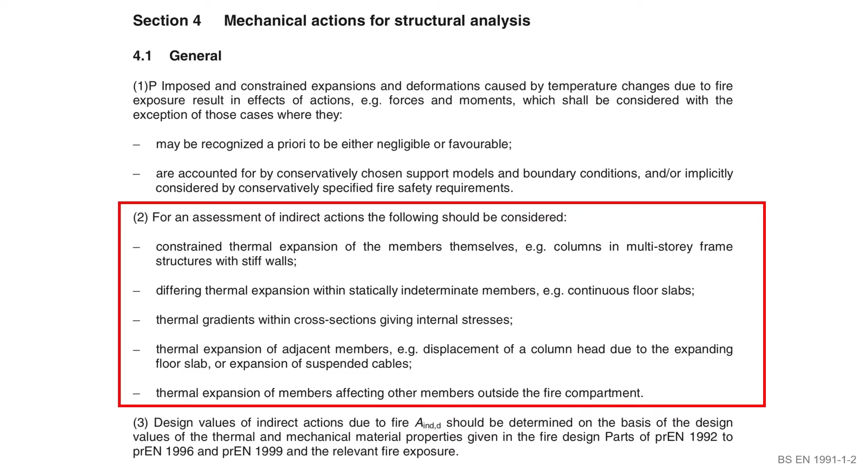Constrained thermal expansion of the members, differing thermal expansion within statically indeterminate members, thermal gradients within cross-sections giving internal stresses, thermal expansion of adjacent members - e.g. displacement of column head due to expanding floor slab, as I just mentioned - thermal expansion of members affecting other members outside of the fire compartment. So it's giving us a lot of guidance about what we, as chartered structural engineers, need to do to consider these indirect actions AD.

So who's calculating this for Category 3 buildings as part of a systematic risk assessment in the United Kingdom? Who is calculating AD in our case? I don't know. Has anyone in this room ever calculated AD? I've never seen it done.

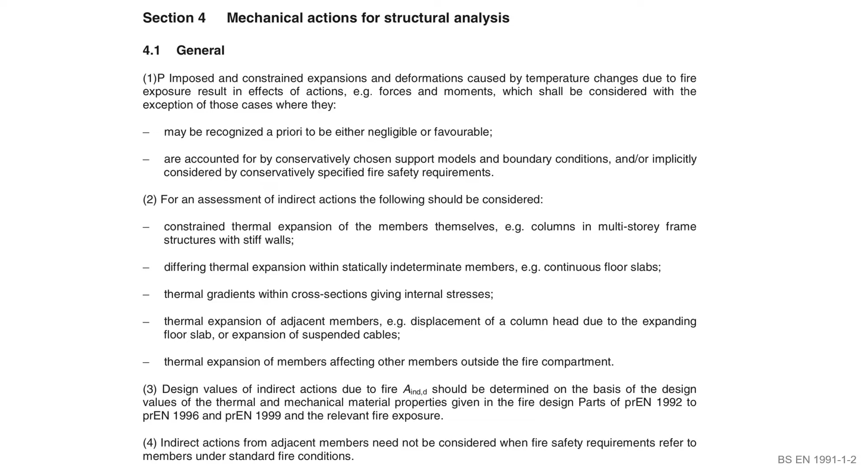Now in the UK, the question is why have I never seen it done? This might be because the Eurocodes do appear to give us a free pass. Right at the end of the page that I put up previously, they have this clause 4 that I've just highlighted and expanded here. And it says that indirect actions from adjacent members need not be considered when fire safety requirements refer to members under standard fire conditions. So if you're just giving 120 minutes fire resistance, you can actually just use your furnace test result, is what this seems to say.

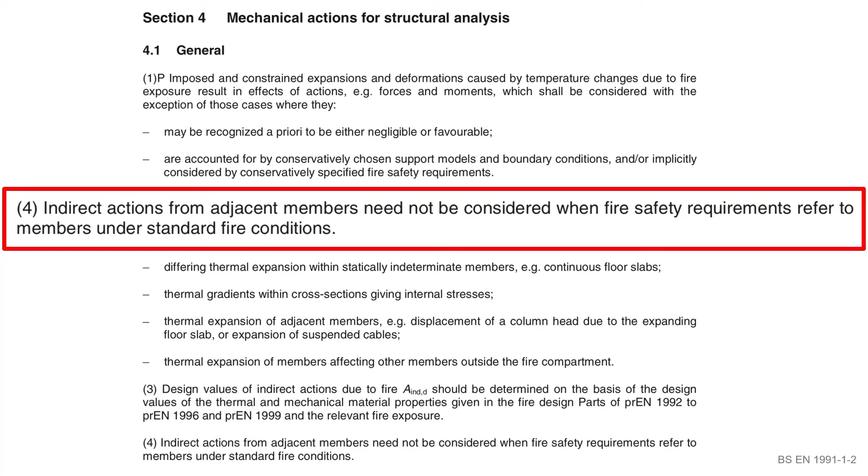And that's great for the fire engineer because it's approved document B that sends us looking here for guidance, not approved document A. Approved document B doesn't require a systematic risk assessment - it only requires that we provide fire resistance. Unfortunately, for chartered structural engineers like me and many of you, approved document A does.

So if I step back and look at this, here's the process for a fire safety engineer under Part B of the building regulations. They'll go to Part B, read Clause B3, then look at the approved document B. That'll lead them to Table B4. They'll find their 120-minute fire resistance. How do I provide that? I'll go to the Eurocodes, which tell me I can just use the simplified methods based on furnace tests, and I'm happy. I can point at that method for having met my obligations.

The structural engineer, unfortunately—and actually it would be unreasonable at this stage to expect a fire safety engineer to undertake a systematic risk assessment for disproportionate collapse caused by fire, which is demanded by approved document A, because the fire safety engineer is clearly not competent to do that. That's clearly the role of the structural engineer.

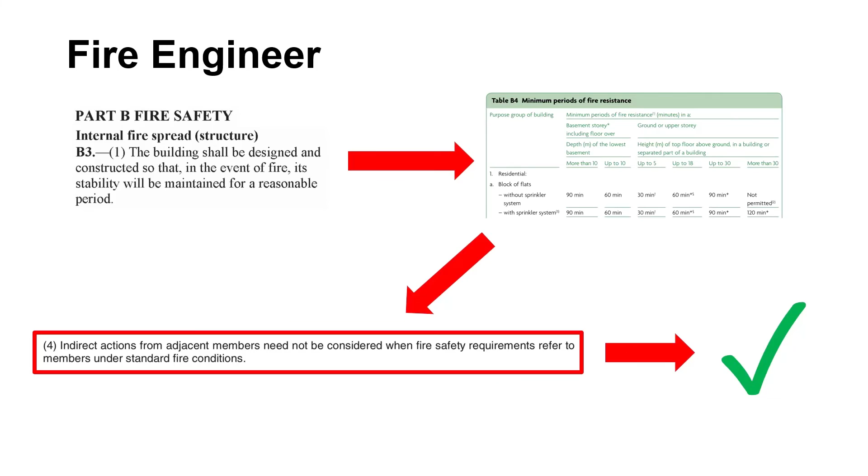So the structural engineer, in looking at Part A, will go to Part A3 that I've put up previously. They will then go to approved document A. They will look at the consequence classes. For consequence class 3, they'll find that they need to undertake a systematic risk assessment. They'll then go look in the Eurocodes.

Unless they decide that simply providing 120 minutes fire resistance does constitute a systematic risk assessment, taking into account all of the hazards that might be expected—which would be the prerogative of the structural engineer—despite the fact that I don't necessarily think that's an appropriate thing to do in many cases.

How do they calculate AD? This, I think, puts chartered structural engineers in a very difficult position, and I'm surprised that it hasn't come up before.

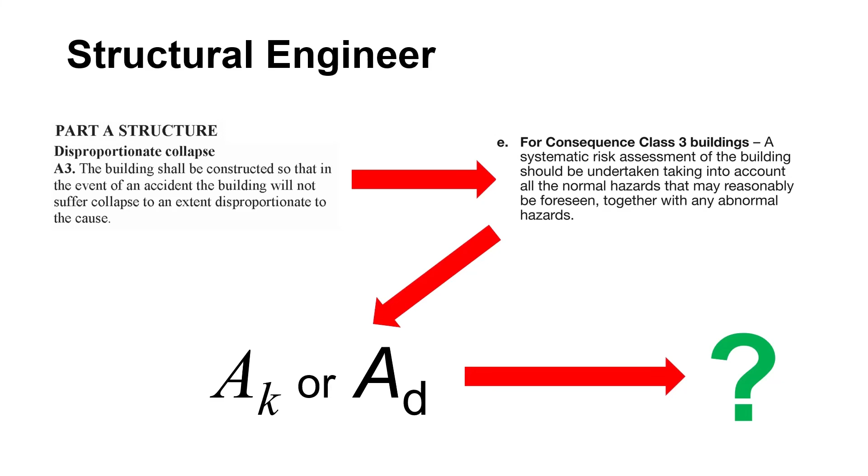So unless I'm comfortable that providing 120 minutes fire resistance constitutes a systematic risk assessment, I need to do something that's more technically defensible. If something goes wrong, what am I going to point at? Of course, I'd love to be told that this is what's happening out there in the real world—that people are routinely undertaking systematic structural risk assessments for fire, and routinely calculating AD or some equivalent means of undertaking a systematic risk assessment. But I haven't seen it happen, and I don't know if it's happening.

And so that brings me back to luck or large conservatisms. Why aren't we seeing structures lose stability in fires more often? Is it because there aren't a lot of fires that challenge structures, which is essentially lucky? Or is it because our structures are so over-designed for fire that we can treat it in this semi-irrational way and we never witness the failures, because there's so much extra strength in them? I honestly don't know, for a given building.

And I think it depends very much on the building, and I think we have to look at each building specifically in order to have any sense of what the answer to that question is. But I do wonder if structural engineers ought to spend a bit more time and effort asking themselves this question.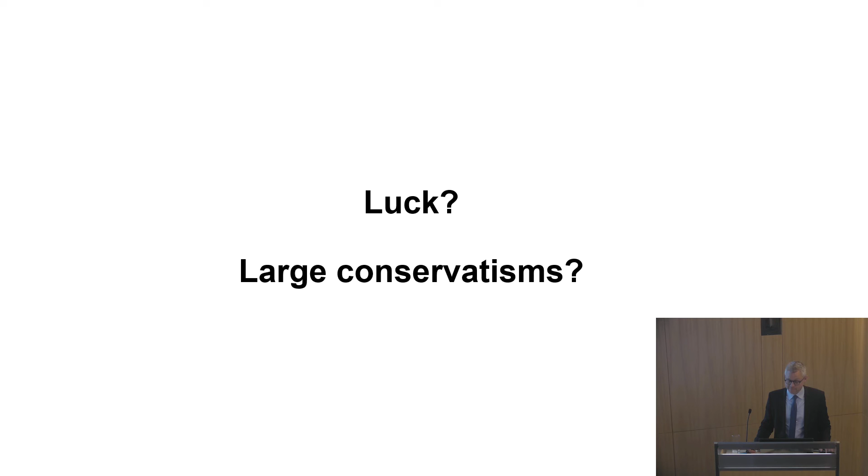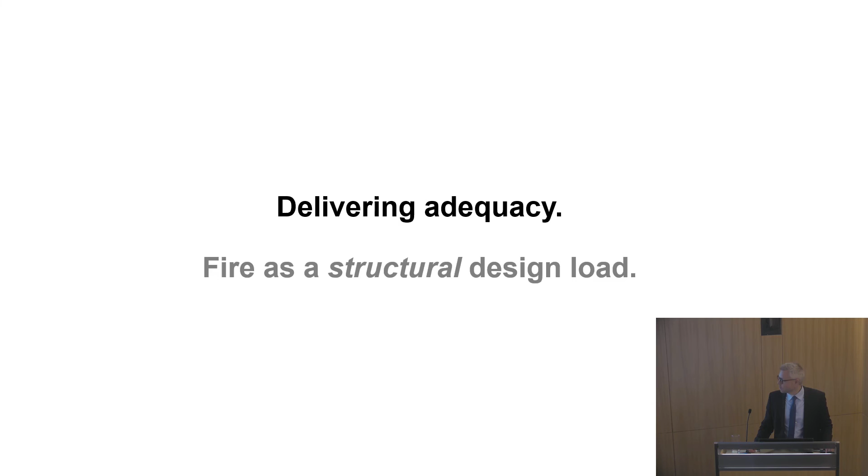So delivering adequacy—how do we deliver adequacy? This was the thing I promised that I would help you try to do as chartered structural engineers. In accordance with our Code of Professional Conduct, the Statement of Ethical Principles, and the requirements of the building regulations and associated statutory guidance, I think we need to start treating fire as a structural design load, genuinely. This is a very, very hard thing to do. It's not easy to do this work. But I think it's what we have to do as a profession.

And so after more than a decade of spreading the structural fire engineering gospel, I find myself as a structural engineer, a fellow of the Institution of Fire Engineers, and someone who came to the UK to become a structural fire engineer, in an interesting position. I find myself wishing myself into non-existence, because I don't think structural fire engineering is actually a thing. I think it's just structural engineering.

And I think it's therefore the responsibility and the realm of this institution and of the members of this institution. Thanks for listening.